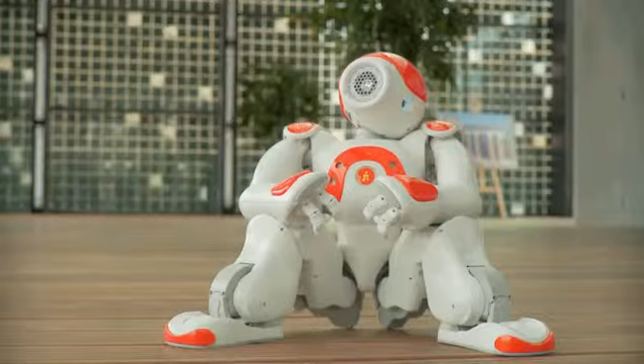I want to come with you.

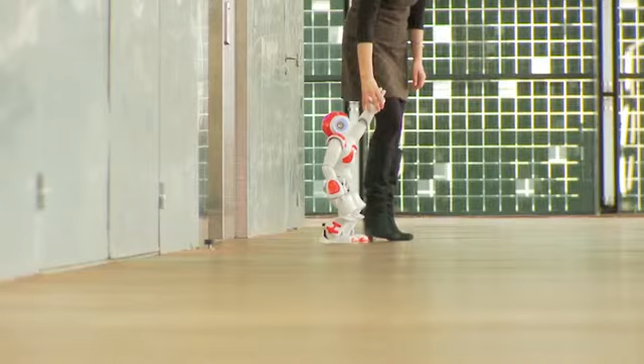Our goal with robots is to have robots helping people, and not only the geek. I want to have robots helping everyone. But in order to do that, we need to have the robot accepted by people. I'm Bruno Maisonnier, head of Aldebaran Robotics, founder and CEO of the company.

Give me something, please.

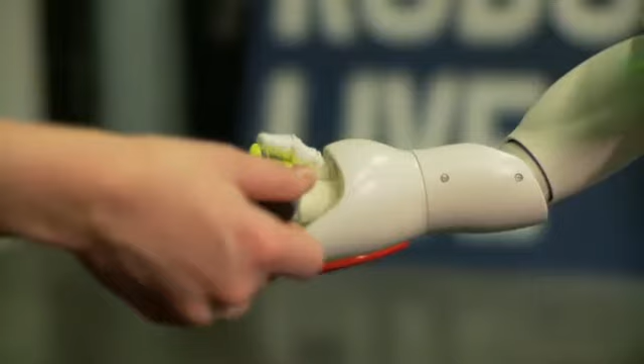Thank you. We think that the robotic market is going to be huge in the future. And this comes from the simple fact that the world population is aging very fast. And we need robots to do whatever they need at home.

What do you want me to do?

When people are depending on someone else and need to have someone else helping them, they are in a secondary position. But when they have a robot doing that, they are in the first position. They are leading. Notre Dame University in the United States, they are really working with robots helping autistic kids. So we discovered that robots are objects they can interact with, they are comfortable with interacting with robots, they like it.

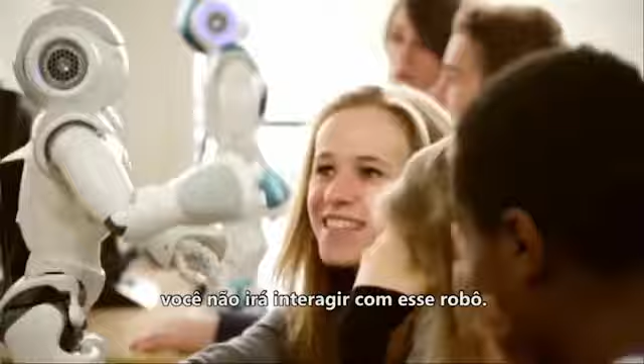The first impression that you get when you see the robots is the outside shapes. If the shape, if the form is too aggressive, you won't interact with that robot. There are many people ready to develop software, but we are just lacking robots. We are just missing robots. So that's why Aldebaran began with a platform for providing all those who want to explore this new world, who want to be part of this revolution, to be able to do it.

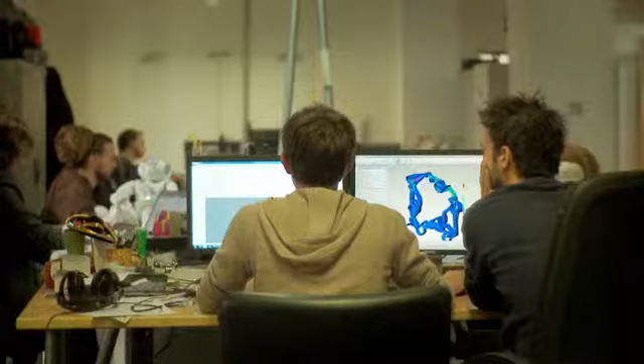I've been working for Aldebaran Robotics for 5 years as a mechanical engineer. I especially work on designing gears and integrating motors into the platforms we develop at Aldebaran. Well, like Ludovic, I am also a mechanical engineer. I mainly work on the shells, but also on internal parts and the structure.

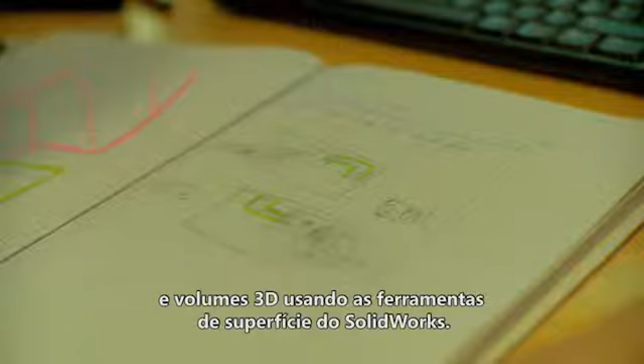For each project, the process is similar. We start with sketches, essentially 2D images, that we then translate into digital data and 3D volumes using SOLIDWORKS surfacing tools. This gives us the ability to rotate the pieces and robots in the space and to improve the design when it's not as pure as we want it to be.

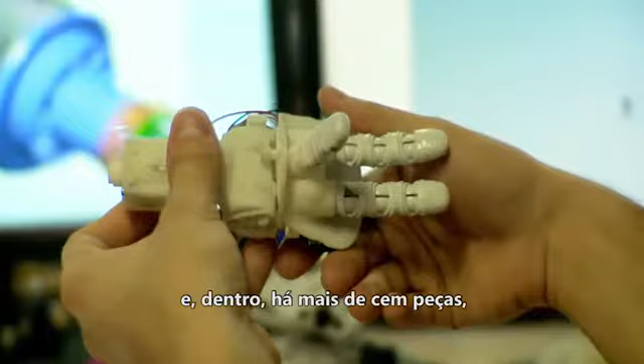So we start with the exterior design of the hand as we have here. It is smaller than a human hand. It's the size of a small child's hand. And inside there are over 100 parts just for one hand. In addition to all mechanical constraints, we have 2 degrees of freedom that we have implemented in this hand, and SOLIDWORKS allows us to look at all the possibilities and optimize the mechanical design inside the hand.

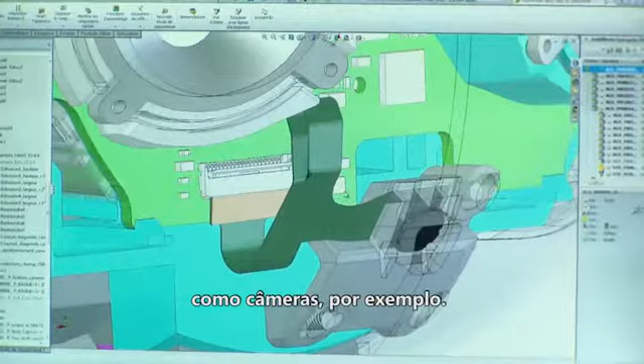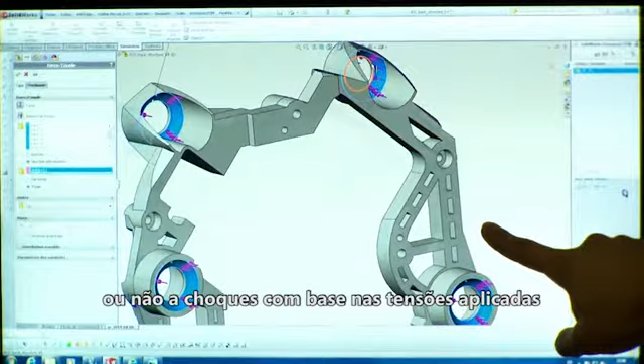Even more complex is the robot's head, which combines mechanical, electronic, and optical components, like cameras, for example. One might say that all Nao's intelligence is gathered in its head. There are also LEDs, microphones, and speakers. We use SOLIDWORKS Simulation, which allows us to generate digital models and know if the part will resist shocks or not, based on stresses we apply to it. And once we have proceeded with validation in SOLIDWORKS, we can move on to production.

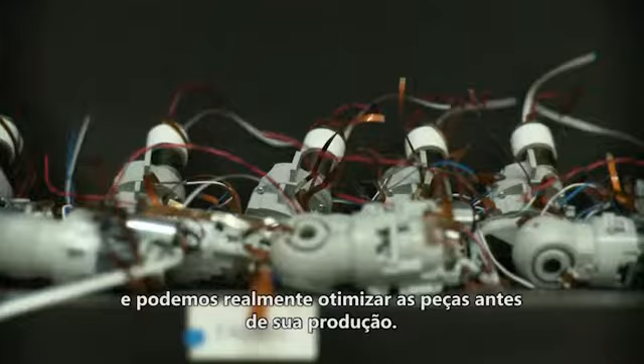We use SOLIDWORKS in order to project the product into the future, and we can really optimize, really improve the parts before it exists, before it is manufactured. You have to know that in that robot there are more than 1,200 plastic parts. On my team, there are 45 people working on the design, and I need to orchestrate the daily work and make sure that when we create new parts, the version is correct. So for that we use EPDM, and it helps us to focus on innovation while EPDM is taking care of the structure of the project.

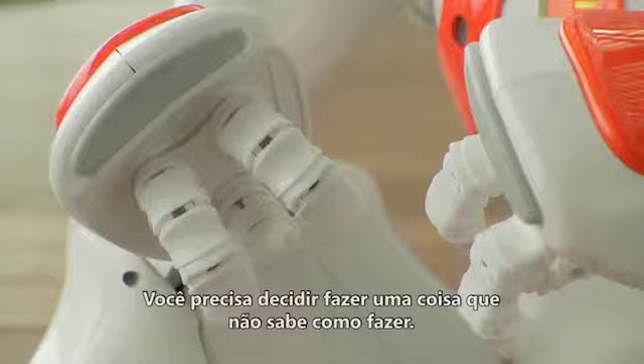I hate the techno stress. I don't want to have devices that are asking me to invest intellectually to understand how they're working. So I don't want my robots to create techno stress for people. When you want to change the world, to improve things, you have to go beyond what you are able to do. You have to decide to go for something you don't know how to do. It's a new territory to conquer.

Shall we try something new today?